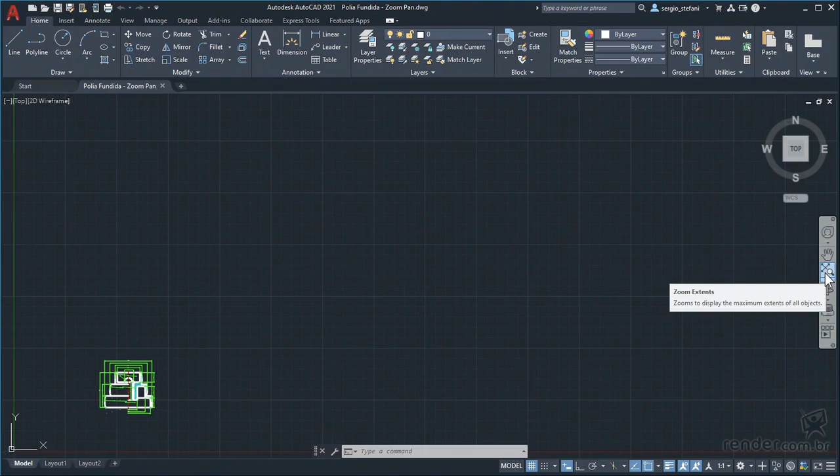One of these is to use the zoom command, the extents option. This command is easily available via this icon in this menu. Clicking on it, the drawing appears as large as possible within the graphical area. That is, always when you need to see your drawing in the largest possible size, use the zoom extents command.

The hand icon represents the pan command. This function shifts the visualization of your drawing in the graphical area. Click the controller, press and hold the left mouse button in the middle of the graphical area, and drag the mouse wherever you want.

When you want, release the button. Repeat as many times as necessary to see what you want. To fully view the drawing again, click Zoom Extents.

If by chance you do not have this menu, click on the View menu and activate the navigation bar option. In this Viewport Tools panel, you can enable and disable the coordinate system view, the UCS icon, View Cube, and navigation bar.

Returning to the zoom command, if we want to zoom in on a part of the drawing to see details, we can use the zoom command and the Window option.

To activate the command is very simple. Press Z on the keyboard and note that the first command option is zoom, press enter. Depending on the version of your AutoCAD, you will need to choose the Window option. In this case it is possible to select it from the command line.

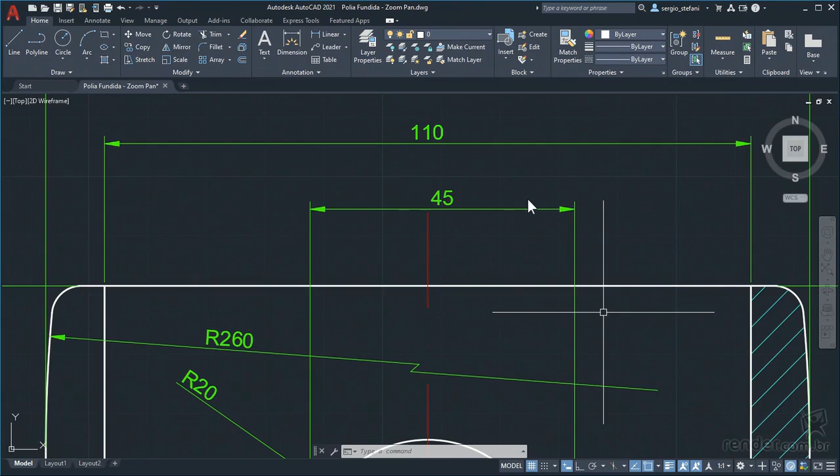The zoom, pan, and zoom extents commands are widely used when creating drawings. But in fact, if you have a mouse with a scroll button, this task can be replaced by mouse functions. We advise you to use a mouse that has 3 buttons and scroll, as shown in the figure.

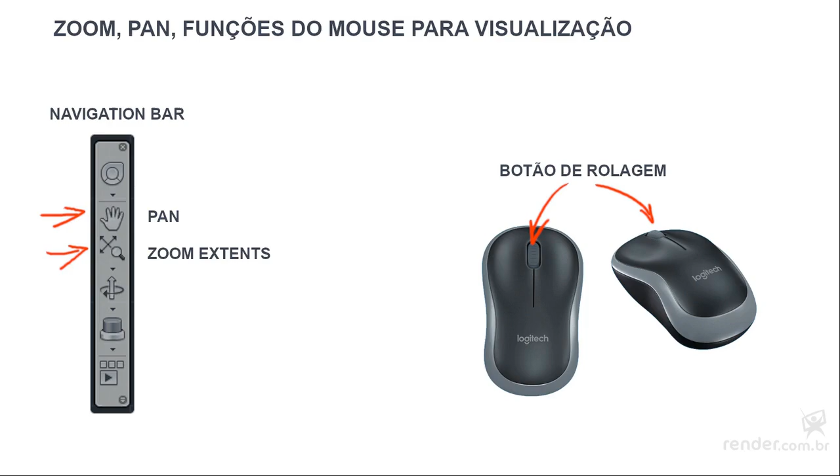The buttons have some important functions within the software: the left button is responsible for selecting commands, drawing entities, and on-screen clicks. Right-click opens the floating menu, which has several commands that we will see later.

The center button, which is the scroll button, has 2 functions. The first: pressing the scroll button and dragging the mouse shifts the visualization over the drawing. This is pan.

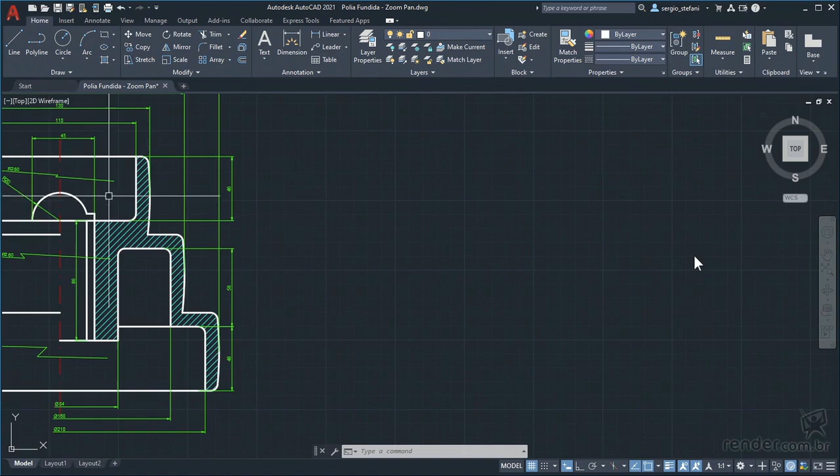The second function: by turning the scroll button you approach and move the view away from the drawing. This function is the zoom. Note that as you position the mouse on the screen and scroll the button, this is where the drawing will move away or move closer.

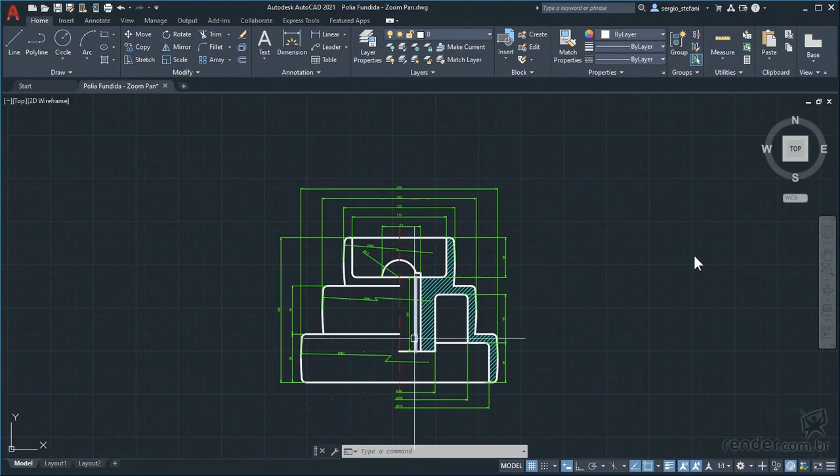In this way, training the use of the scroll button, you will have good productivity in the elaboration of your drawings. The other options of zoom we will see in the course of the course.

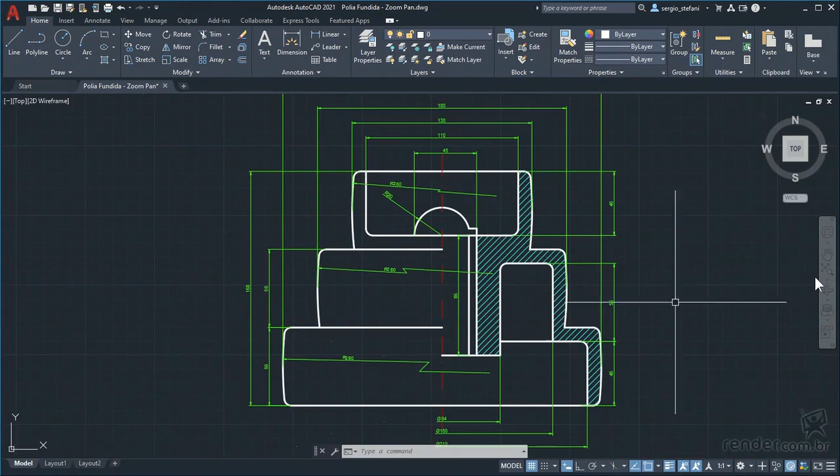We have seen in this lesson how to use the most commonly used features for viewing drawings: the zoom and pan commands, and mouse functions. Train their use, it will be very useful in the course of the course. In the next lesson we will start and practice the operation of some commands. Until then.